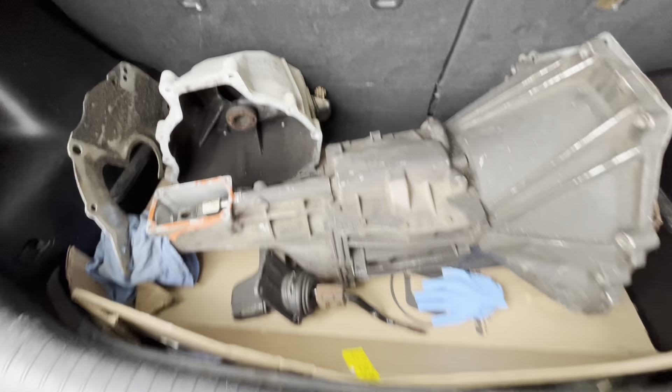What's going on, guys? Look what I picked up today. A little T5 core here. Not just one, but two. So we're going to take one of these guys apart today and see what we got.

I got a pretty good deal for both of them. I drove about an hour up the road and picked these up. It's very hard nowadays to find a good core. Usually you have to piece a couple transmissions together just to get a good T5, but they're getting harder to come by.

So I couldn't pass this up for both of them, especially for the price I got. Hopefully we don't have any cracks in the case or the bell housing, but I can always TIG weld that. I'm hoping for a nice solid core.

Hopefully no one's opened it up before, because if they've opened it up before, sometimes people don't care. They use the wrong tools when they take things apart, and they use hammers and mess up the shafts, and it can be a real headache, especially with the bolts. People either use impacts to tighten the bolts or they over torque them. So most of the time I got to do some thread repair.

So let's get these inside, we'll tear them down, and we'll see what we're working with.

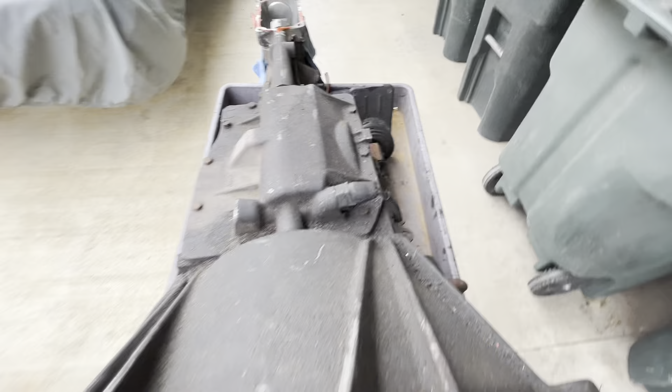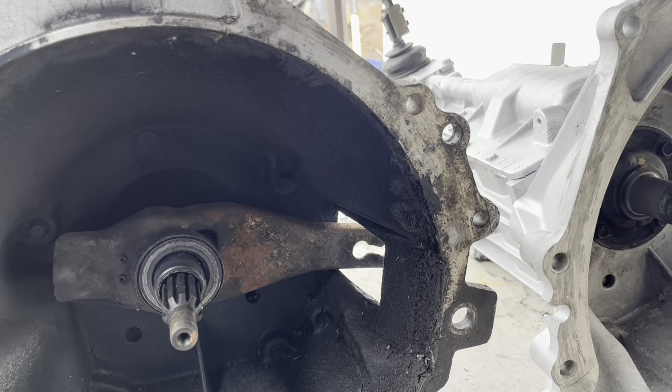Right off the bat, there is something different about the front of these. They both have a 5.0 Fox body bell housing, but there's something different that with experience you can see.

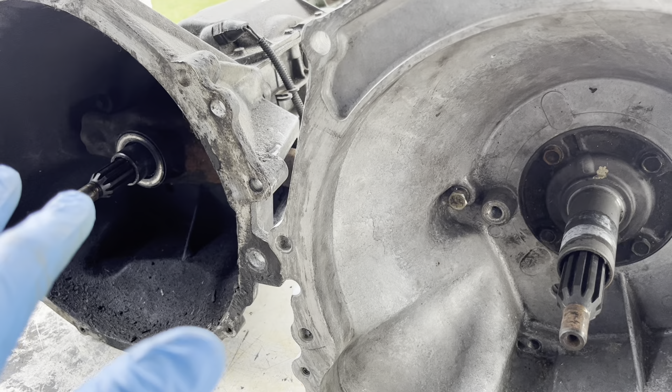Now, I'm going to point it out to you, but if you're looking to buy a T5, go watch my video on how to identify. It gives you a lot of tips if you don't really know what you're buying or what you're looking for when you're getting a T5 for your Mustang.

So right off the bat here, I can notice that the diameter here is thinner than the diameter on this one. Let me get some calipers and I'll show you.

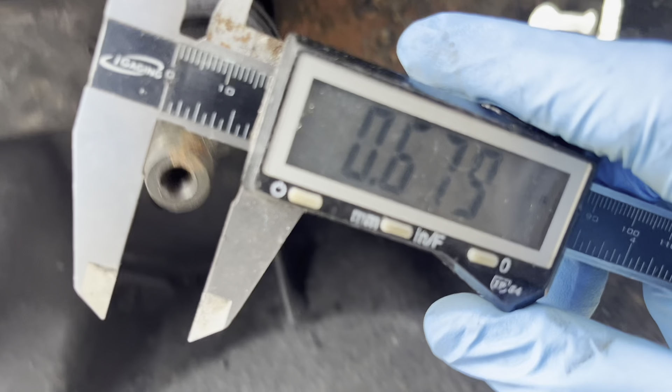So the V8s had a thicker input. Now, I don't remember the specs off the top of my head, guys, but I know, look at that. I know that this one is thinner. So we're looking at about 90 thousandths, maybe 80, 90 thousandths thicker.

So if you were to put this in a 5.0, yeah, probably not too good, because this kind of guides it into place, and I don't think this thing flopping around in that pilot bearing is really good for the longevity of the transmission, and it's just not right. So if you were to put this in your 5.0, yes, it'll bolt up, but is it 100% correct? No, it is not. So I do not recommend that, and this is something to look for.

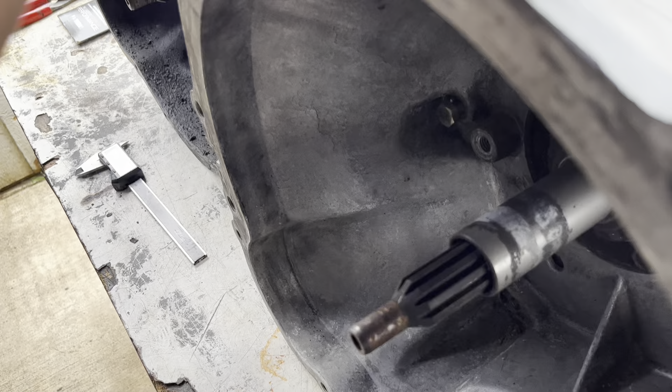The next difference is we don't have our switch for our cruise control, neutral sensing switch, neutral safety switch, whatever you guys want to call it. There's a lot of controversy on that switch. I'm not going to get into that, but this one does not have it, and this one does.

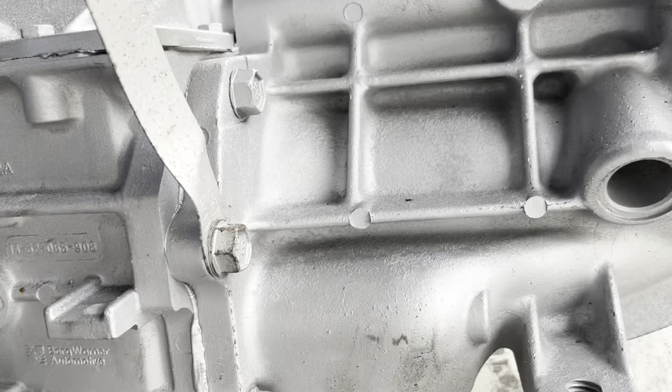If you're not sure what you got by looking at the front, hopefully we got the tag. When I looked at the ad for these T5s, only one of them took a picture of the tag. And a lot of times when people are selling their T5, they'll take a picture of the tail housing number or the case number, and that doesn't really tell you shit. So if you guys are posting your T5 for sale, please take a picture of this tag, and it helps identify where it came out of and the gear ratios inside.

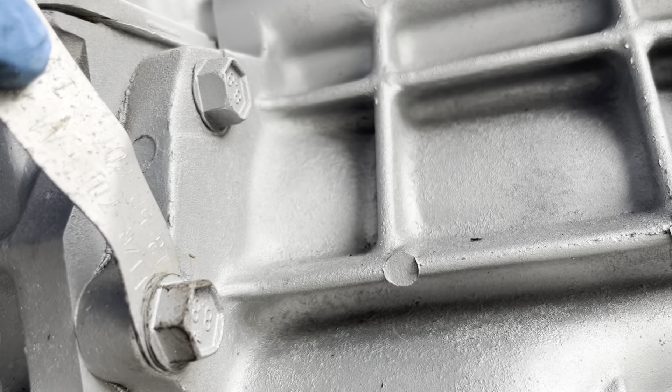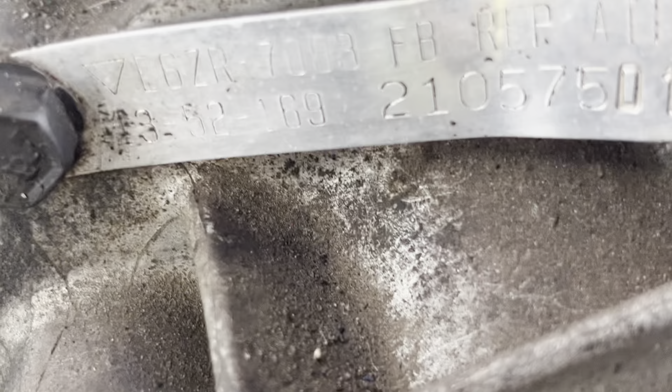So you're going to want to look for the 1352-3-digit number. So you got 1352-207 right there. And for the dirty one, we got 1352-169. I think that is an early to mid 80s number.

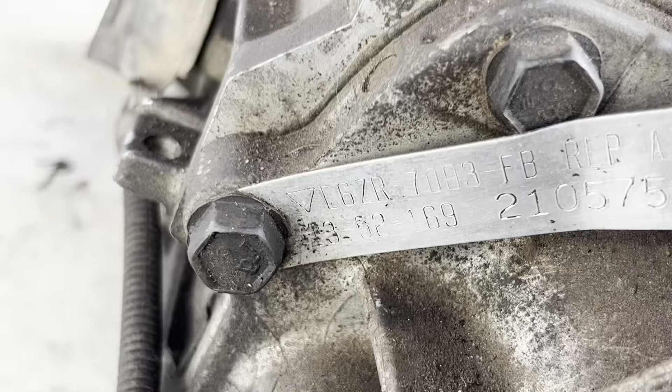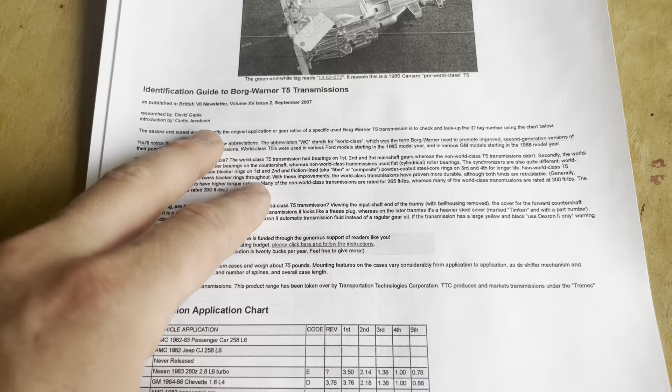So let's take a look at the chart and we'll see what we got. So this website here, guys, it has great information, britishv8.org. I'll leave the link below in the description. It tells you how to identify T5s. These guys did their research, and this kind of information is priceless.

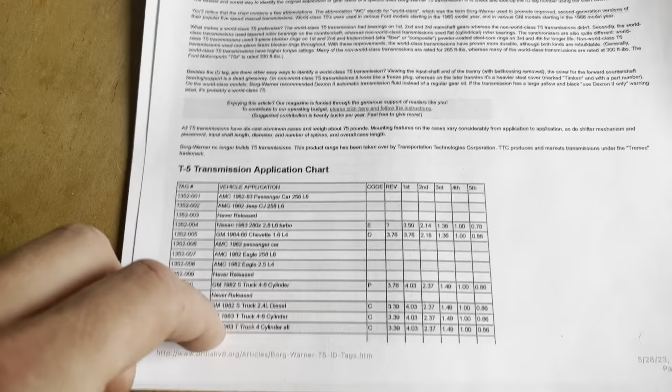So let's see here. It starts all the way from number 1. These were in all different vehicles, GMs, Nissans, AMCs, Jeeps. So it's pretty cool. Let's find that first one. It was 169.

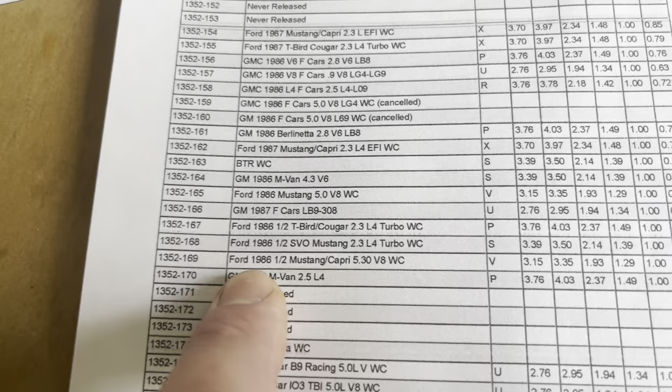1352-169. 1986 Mustang or Capri with a 5.0 V8, world class. I think that's a typo, the 5.30 - there's no 5.3 engines around then.

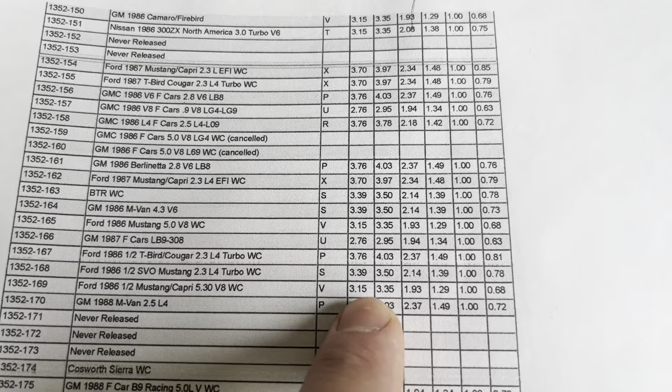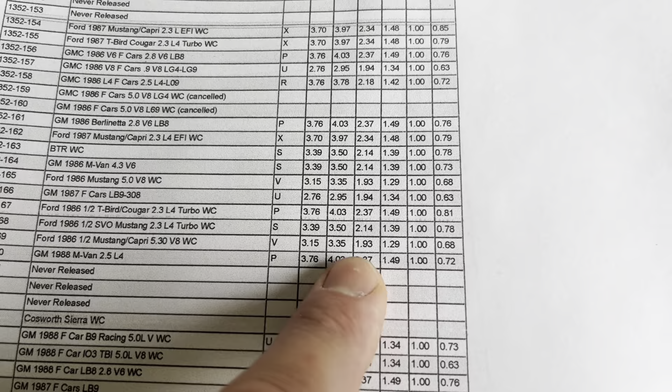So it's going to start with the reverse ratio, and then we go from first, second, third, fourth, and overdrive for fifth. So it's got a nice 0.68 overdrive, and there's the ratios for that one. It's pretty much the standard T5 Mustang ratio.

So that's that one. And the other one I believe was 207. This one specifically, I don't know which one it came out of, so it just says Ford World Class. Here's the ratios - there's reverse, first, second, third, fourth, and fifth.

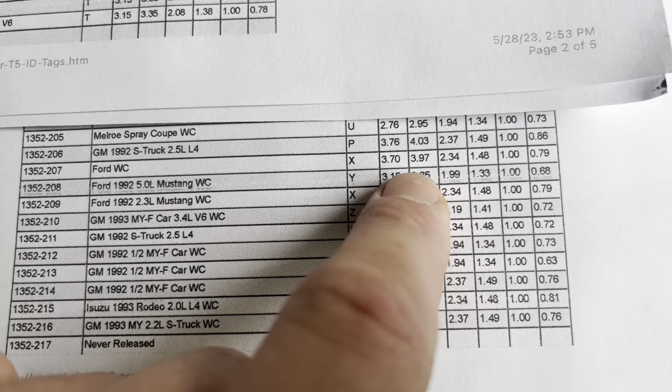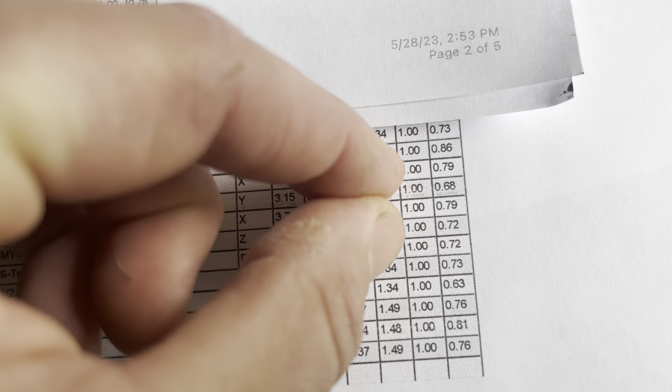If we go to a 2.3 liter, 1992 Mustang 2.3, we have the same ratios as these two guys - the 397, 234, 148, 100, and 079.

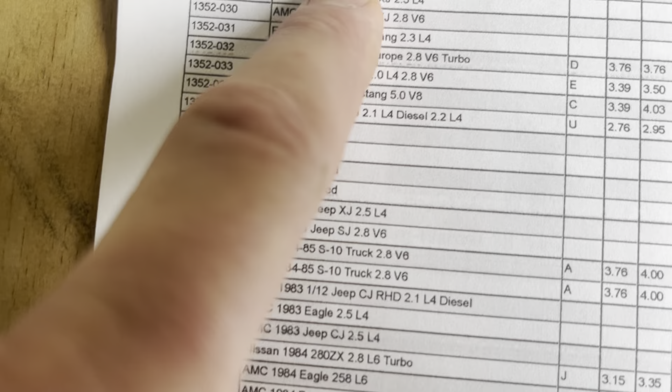So if you go to the SVO turbo, here we go in a T-Bird. This is basically the same ratios if you were to put these side by side as a turbo or 2.3. So we're just going to call it a 2.3 liter because that's way different than a V8. A V8's 335, so it's closer to the 2.3 turbo or non-turbo.

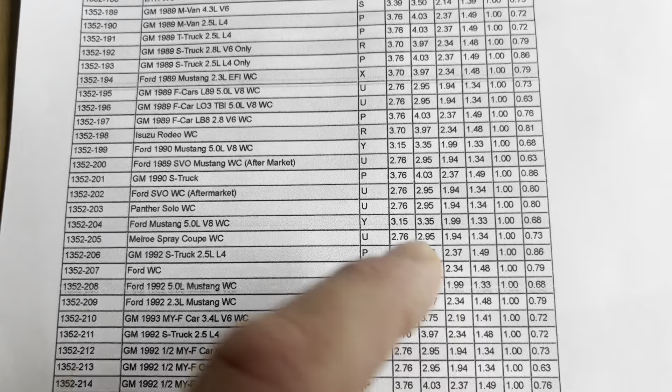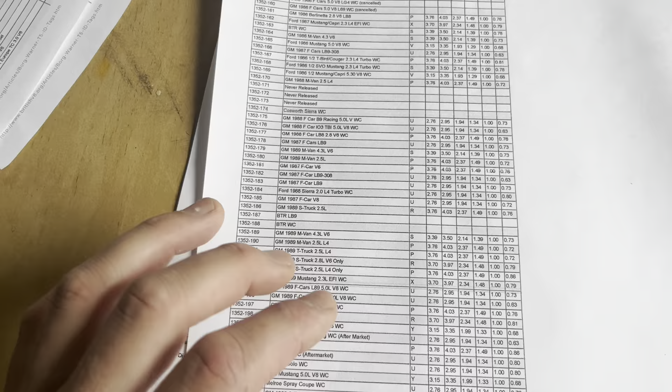So pretty cool, guys, check this chart out. Go sneak under your car, see what kind of tag number you got, find your car and tag number on here, and you might find out you don't have a V8 T5. You might find out you have the correct T5, or you might find out you have an earlier T5 than what you should have in your car. So go check it out.

A lot of times the threads on these bell housings are stripped. Guys, I think the torque's only like 35 foot-pounds, so don't kill it on these bolts, okay? I would put a little bit of Loctite, especially if you have a cam or a modified Mustang, because everything vibrates and they can work loose. It has happened to me, so just make sure they're tight - a little bit of Loctite on them.

So we're going to take apart the 4-cylinder T5 because the only thing I'm interested in is the case, the bell housing, and the tail housing. The gears inside are not the right ratio for a V8, and I'm probably going to take the gear set out. I'll have a nice complete gear set for somebody who has a little 2.3, either it's a turbo or something, and they want to throw the gear set in there.

I know there's a couple of Volvo guys that do this swap on some kind of Volvo out there that you can do this swap on. They swap T5s into them, so I've sold a few of those to some Volvo guys. But I'm not a Volvo guy, I'm a diehard Mustang guy, so we're going to get this up to V8 specs here.

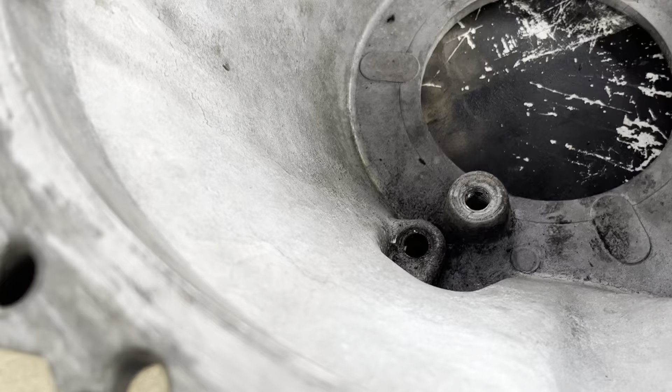So unfortunately, as I feared, as suspected, that thread is gone, so yeah, I'll have to replace that. No big deal, it's just another thing you got to do. This one is a little hammered too, I'll be able to fix that one, but the other two look okay.

It's also something to note, guys, and check out - we are missing a pivot ball, so I'll need to get one of those.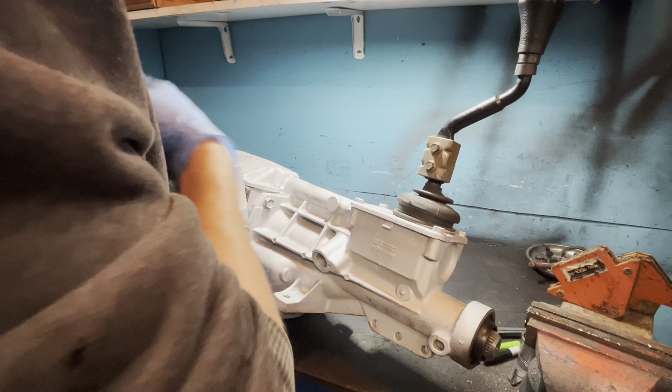Always get so excited taking one of these apart, even though I know exactly what's inside, how pretty much everything works. But you know, it's still cool to see what you picked up out there and what you got on the inside, if you got anything good or bad.

Already these bolts are like freaking over torqued on here, on the shifter.

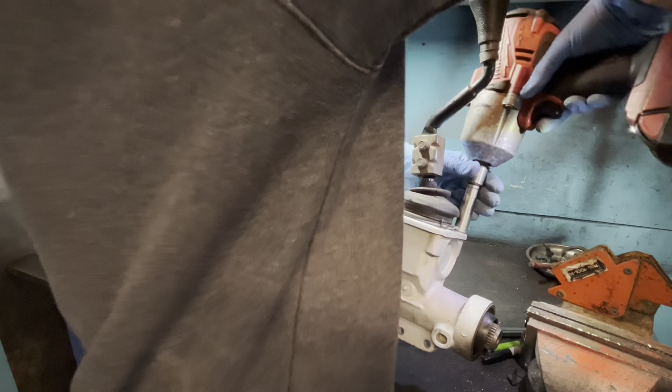Guys, just snug these bolts up, you don't got to kill them, all right? That one was better. I always kind of just throw those away.

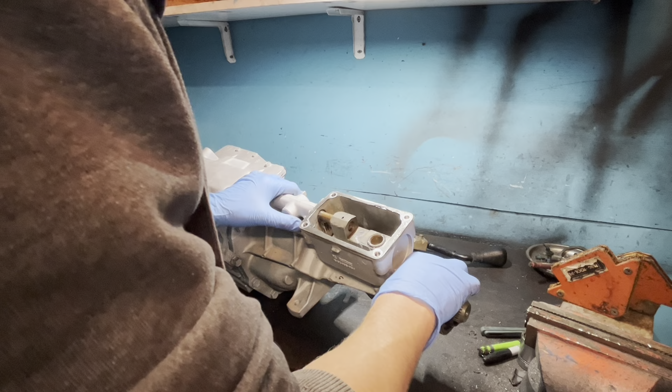Stock shifter. It's very hard to find a virgin out here. You know, most of these T5s have been apart 2, 3, 4 times, rebuilt, through so many hands, in and out of Mustangs, through the ringer. So finding a virgin is the best thing you can do, because it's never been apart before. Everything's torqued to factory specs, nothing's been messed with. So it makes the whole rebuild process go a lot smoother and makes my job easier.

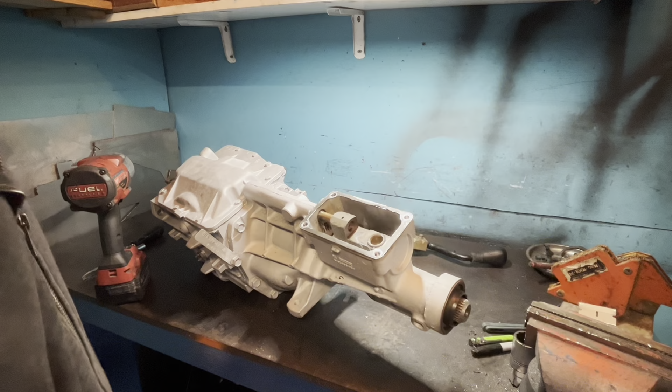As well as, if a customer's paying for something, they don't have to buy any extra parts. There's no extra surprises in there. I'm not gonna explain how this thing comes apart - go watch my video, I have like over an hour and a half of footage on how to rebuild your T5. So this is more of a, you know, went on a hunt and we're seeing what I picked up.

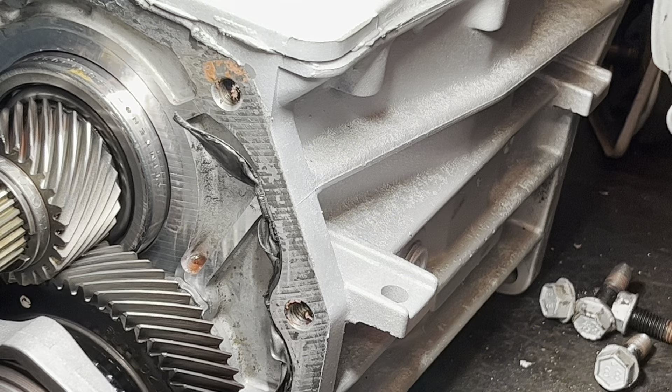They look freaking beautiful, like brand new. Another thing with the 4-banger T5s, I don't even know how much horsepower those things had. I know the SVOs had like 230, they had a little bit more than the V8s, maybe a little less, don't remember off the top of my head. But even a stock 2.3, I don't even think they made 100 horsepower. So as long as the oil level was right through its whole life and the oil was changed at least a few times, this thing will last forever.

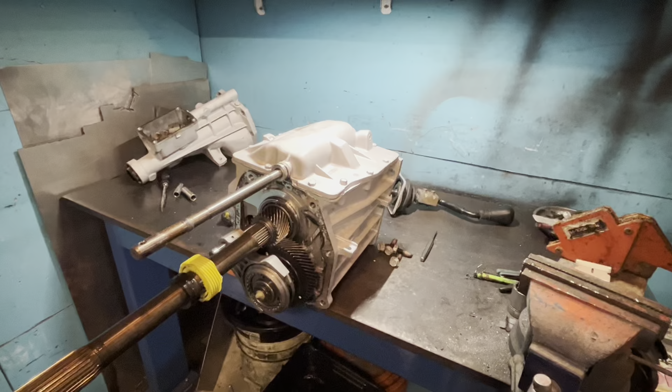There's no torque going through this thing. Now we're gonna zip off the, I think there's 10 of them, the 10 top case bolts here.

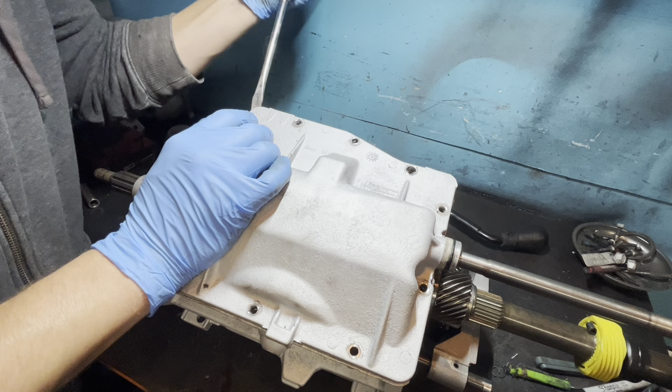Now there's 2 pry points on this top cover, guys. There's reliefs on each corner, so you don't ruin the mating surfaces. Just so you're aware, there's one here, one here. I think early ones only had one, I might be mistaken. There we go. She was on there for a while.

Well guys, as luck would have it, my phone literally ran out of space as I was pulling this cover off, so let's do the big reveal one more time.

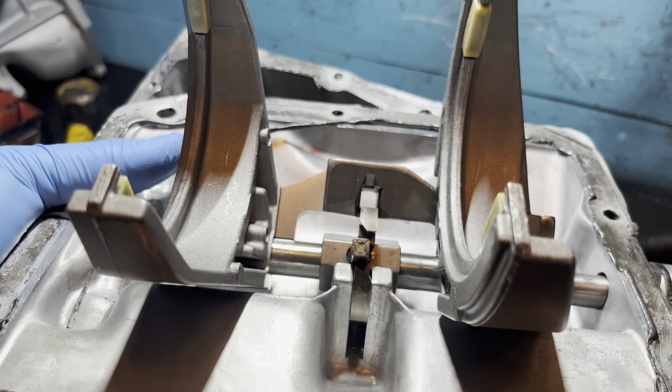So we got a nice top cover here. Nothing seems to be broken or bent. Actually, that's just some casting, I think. Yeah. Plastic pads - the plastic pads look pretty much brand new, they don't show any signs of cracking or breaking. So, like I said, this thing probably had 80 horsepower going through it its whole life, so it was living good.

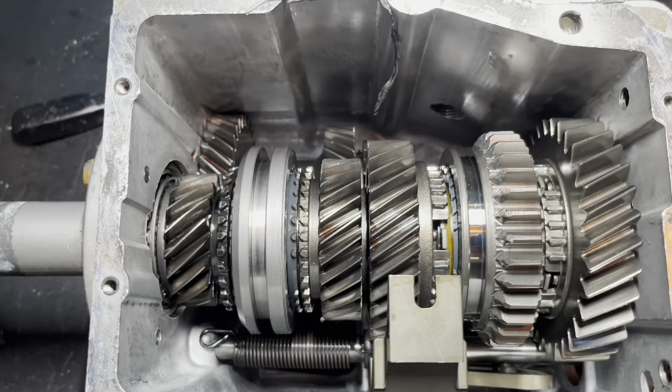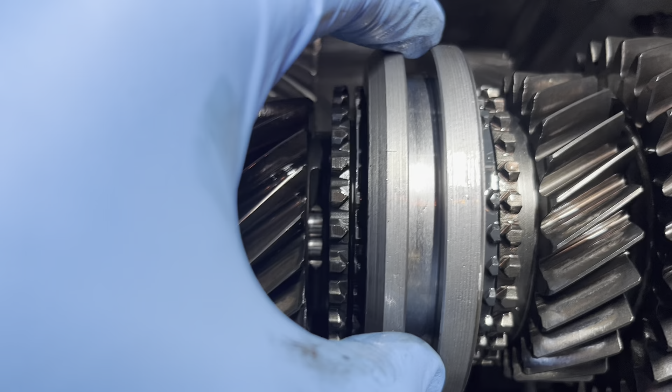Slight, very slight roundness to it, but it's normal wear. Same with third, they look pretty nice, as well as fourth. Synchro is worn down, it's still stopping the gear though. That one has a little bit more material on it. That one looks pretty good.

So, well, this is a win, guys. All these gears, as far as we can see from here without taking it apart any further, look great. They can definitely be reused, this whole gear set. So if somebody's looking for a little 2.3 liter gear set for their SVO turbo or whatever, it'll be up for sale. So, good to see that I got something out of this transmission - it wasn't just a blown up pile of crap.

So the only thing is I gotta take a lot of time cleaning this case, getting all that paint off. That's gonna wrap this one up, guys.